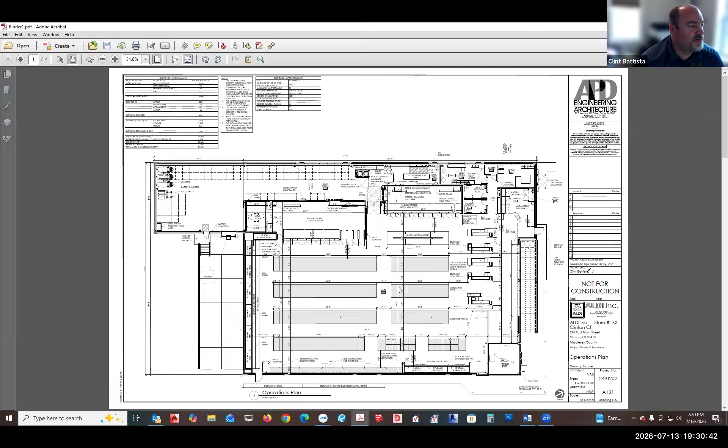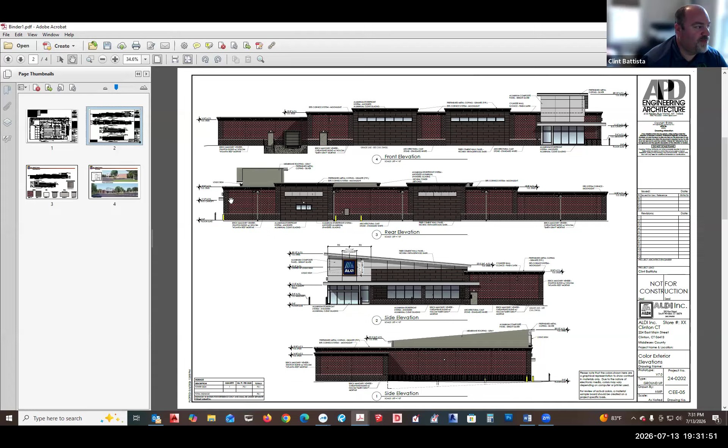These show the materials. The reddish color is a mix of different shades of red Spec-Brik. The pilasters and the water table are more of a gray colored Spec-Brik. The EIFS cornice up at top is kind of an off-white color. The main tower aluminum composite panel is a bright silver with a matching coping. This is the metal coping over top of the white EIFS cornice. And these are the Nichiha fields, which are fiber cement but have the aesthetic of wood planks.

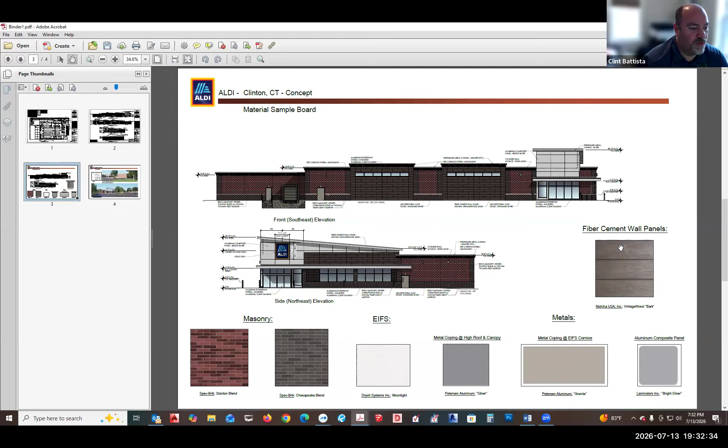Hello? He's probably just getting connected again. Clint, are you able to hear us? Yeah, was there a question? I'm sorry, yep, our recording paused while you had the 3D rendering up, so anything that was said right after - do you want me to show that again? Please.

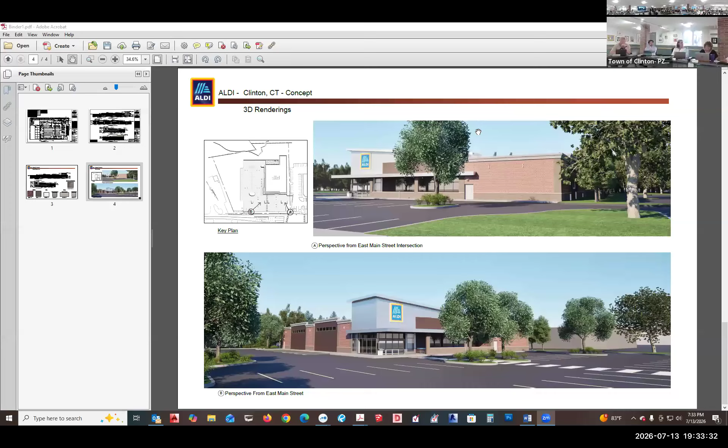Here's that 3D rendering that shows the two front side corners of that building from Route 1.

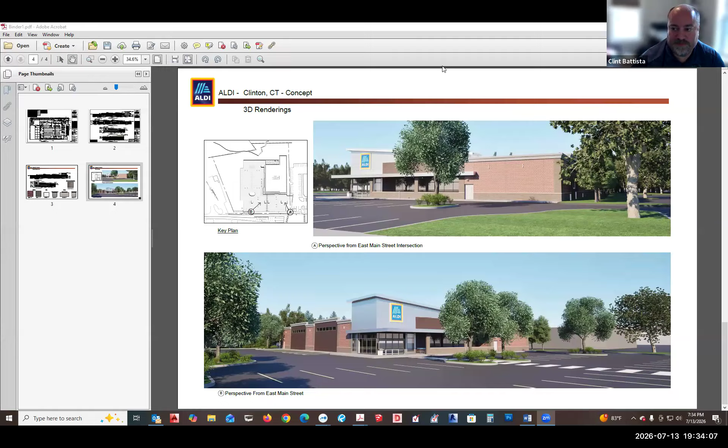Anyone have any questions that I could answer? We'll do questions after the team is done. Okay, do you want me to go back to anything or to stop sharing? You can stop sharing for the moment.

Just hang tight, I'm just going to go over the special exception criteria really quickly. So we are obviously here for a special exception permit, so there are 8 criteria that we have to meet. The first is the location, type, and character of the building. It has to be in use in harmony with the development, which I believe we are. Walgreens is adjacent to it, and the Stop and Shop shopping center is across the street, so I believe we meet the first criteria.

The second criteria is that adequate access for emergency vehicles and fire protection have to be met. Of course, the fire marshal and fire chief have reviewed it. They want to see the plans in construction, but the only thing they asked for was that we demonstrate that a fire truck can get around the site, which we have done. They also asked for a hydrant, which is placed on the site, and a Knox box for them to access the building. All of that will be worked out with the building permit at the building permit phase.

The third criteria is that the streets can adequately serve the development, which I think our traffic engineer alluded to, and we satisfy that criteria. The fourth is that the lot is of sufficient size to accommodate the use, so we meet the gross floor area requirements, lot coverage requirements, and landscaping requirements, even for the future improvements. So I do believe that we meet that criteria.

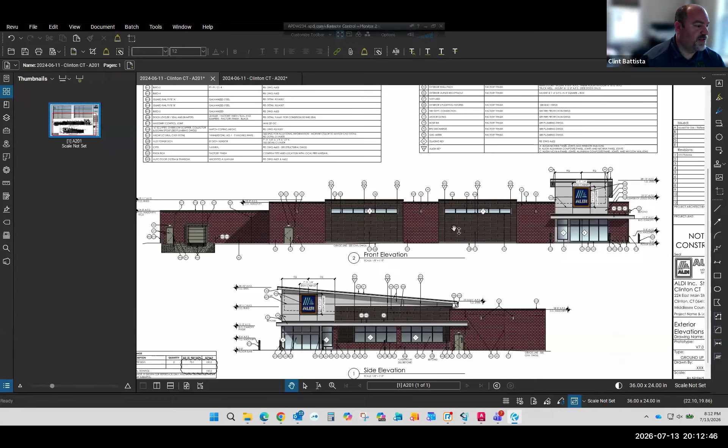So this is the side that faces Route 1. This is the side that faces the parking lot. This is the back, which is nothing but that Spec-Brik material, and then this is the loading dock area, which is nothing but the Spec-Brik material. So if you compare that to these drawings, I've got to flip over to the screen here.

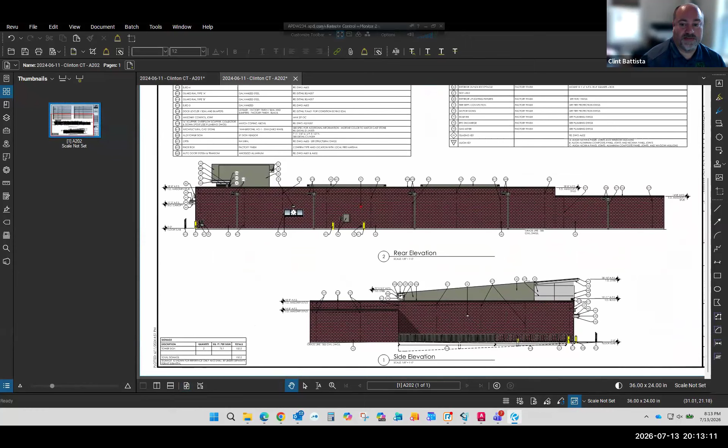So as you can see with these drawings, let me know when that pops up.

We added pilasters, a water table, and the top cornice here. We removed the sign on the side of the building. Each corner has those pilasters and the water table. We also added additional Nichiha panels on the back side of the building, where before it was nothing but one color brick. So we actually made substantial changes to this building design.

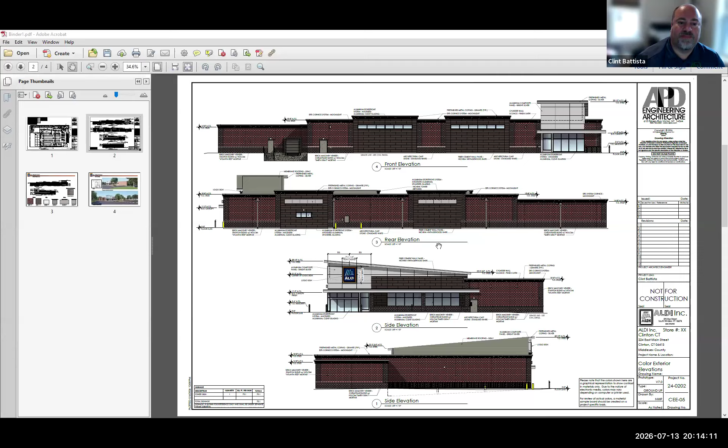Do you have the manufacturer's view of this material so the commission can get a better example, like an up close detail of it? I think that was on page 3 of this.

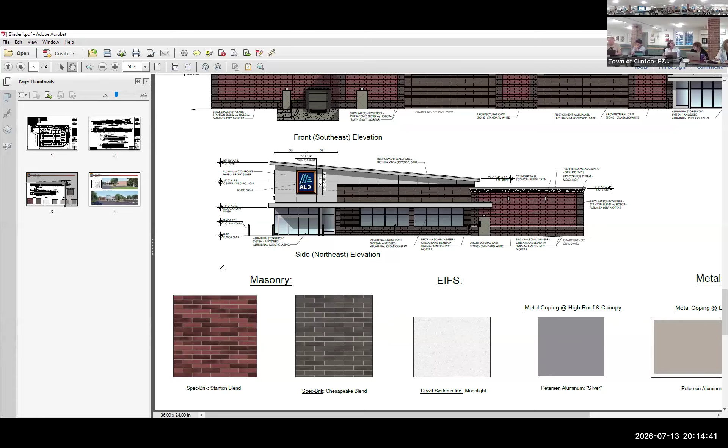This is a picture of it - it's not to scale because it's fit on a sheet, but this is kind of what it looks like. The red is not displaying as shades of red; it's hard to do that, but this is actually what it is. And the gray is kind of some shades of gray. I do have a material board in the office if you can confirm that the original materials sent to us are part of this application, we can certainly take a look at that. Yes, as long as they're Stanton blend and Chesapeake blend, those are accurate.

I'm still trying to understand - for the record, I'm Wes Kavanaugh - I'm still trying to understand these concrete masonry units. Are we saying they are 8 by 16, which is a standard concrete block size, and they are imprinted with a smaller pattern? So you are referring to them as a large brick, but they are concrete block size. That's correct, it's big. The manufacturer is called Spec-Brik. That is the actual manufacturer of this piece, and it's a concrete masonry size. Okay, so it's a concrete block size.

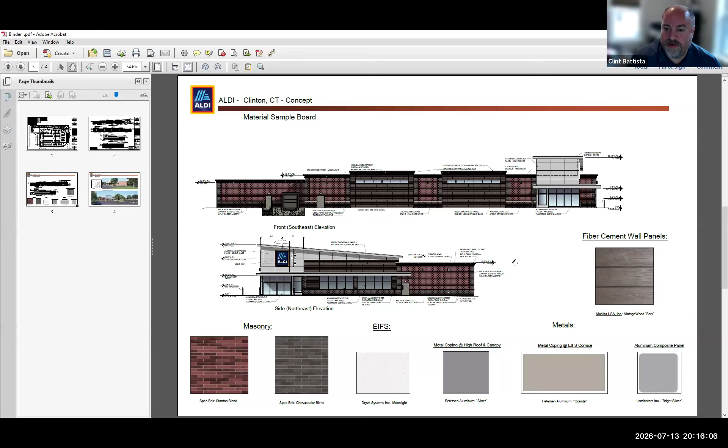So there's been no effort to make the facade look like a conventional brick facade, other than in color. It's a larger brick that has integral color, so there's less maintenance on efflorescence and the color wearing out, because it's not just painted.

Okay, we have the architectural samples here. Go ahead, walk around with it. Okay, so I don't know what we're looking at, but it looks good to me.

Well, I mean, I'm sure you can't say anything, but I'm sure. This only is what we had back at the design review meeting, so these are just the colors. I'll just come close to you guys and walk around and show you what they look like. I don't know if you guys want to pass them around or if I'll just stand here. There's Jeffrey, there you go. Sure. Here's the final, that's the approved one.

That is gonna be different shades of red. Yeah, all of it, I understand. I will put some on the board here if it doesn't fall off - the second page to the second board. That's what I said, that's gonna be different shades.

Mr. Chair, I just have a question about, again, Spec-Brik is a company - can I address them? You can address them. Spec-Brik is the company that's providing the facade bricks for the wall. And the apprehension - you can't speak for Aldi, but in your experience, reducing it to be more in line with the regular size brick we see is potentially cost prohibitive, and that's the issue we're seeing. Again, it's not that they don't provide it - there are two items. One is that a typical brick, because it's much smaller, drastically increases the labor cost to install it, so it is a significant amount of money to change that product. The other point is that Spec-Brik is a prototype approved material by Aldi, so it's in their palette of materials that they typically use.

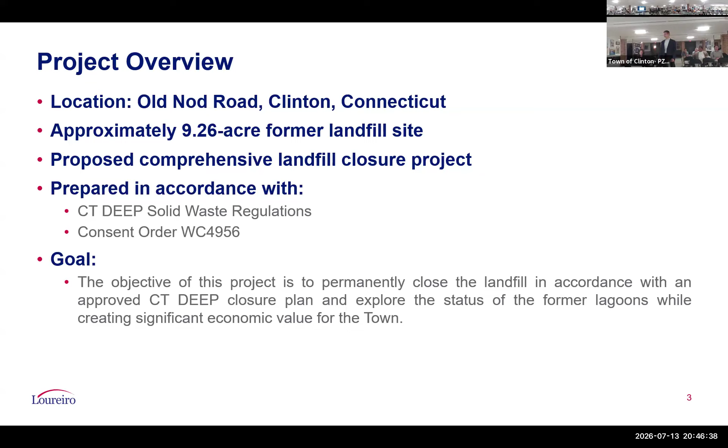What exists today is a landfill that still exists. It's not closed, so it's heavily vegetated with trees over much of it. It looks nice in that it's forested, but that's not acceptable for a landfill cap - when trees grow on the cap, it degrades it, and that's not an acceptable condition. This is a future closure obligation, so although the DEP hasn't actively enforced it, it's still something the town of Clinton has to deal with, and it's a multi-million-dollar unfunded environmental liability. So that's what exists today.

After this proposed project is completed, the consent order will be satisfied with a DEP approved closure. Our proposed approach will require no taxpayer funds. The town will benefit from a host fee from revenue generated by the project. We will have the opportunity to consider future use of the property and take care of the long-term environmental liability the town has today.

So again, we want to take care of the consent order, establish a stable final landform construction, minimize infiltration of waste materials, and reduce potential for leachate generation. This will improve stormwater management, stabilize steep slopes that exist today, protect adjacent wetlands and water courses, and have a long-term environmental stewardship program as part of the closure plan that's in the process of being approved by the state.

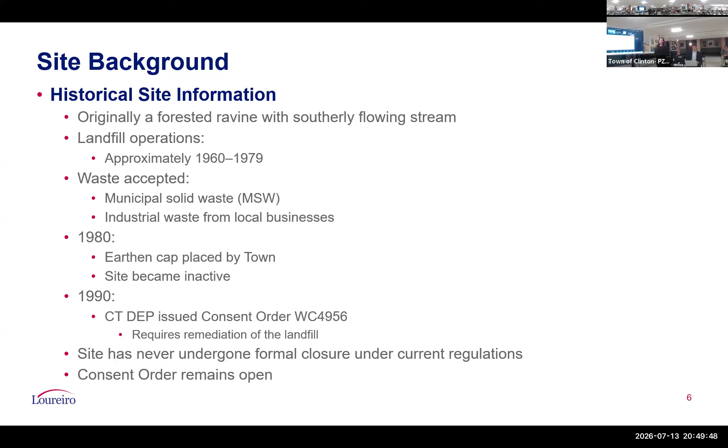So just to run through all the permitting and regulatory agencies we had to go through: we recently received approval through the town's Inland Wetlands Commission, received that last week. We're currently going through planning and zoning. Also through the state, we had to submit a solid waste individual permit, which included a closure plan. And we have approval on our material acceptability protocol, and we also have approval to begin stockpiling on the site.

We are waiting on full approval of the application, but based on conversations with the state, we know that's forthcoming. In addition to that, we also recently received authorization through the state stormwater program. We submitted a construction stormwater general permit that's under the project as well.

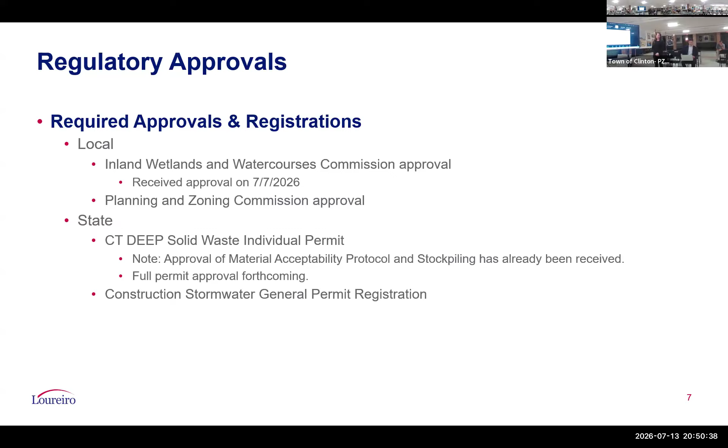So current site conditions: the site is currently vacant and undeveloped. There's dense vegetation throughout the entire parcel. There is an existing access road up to the top of the landfill from Old Nod Road. Adjacent uses consist of forested areas, residential properties, and the DPW property is located to the south of the landfill.

As I previously mentioned, there is an existing cap or cover that exists on the site. It ranges between 6 inches to 2.5 feet. And based on historic borings that were collected, waste was located between 1 to 51 feet below grade.

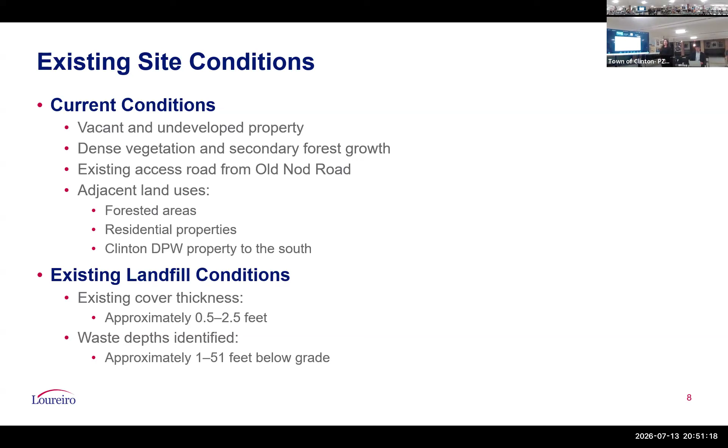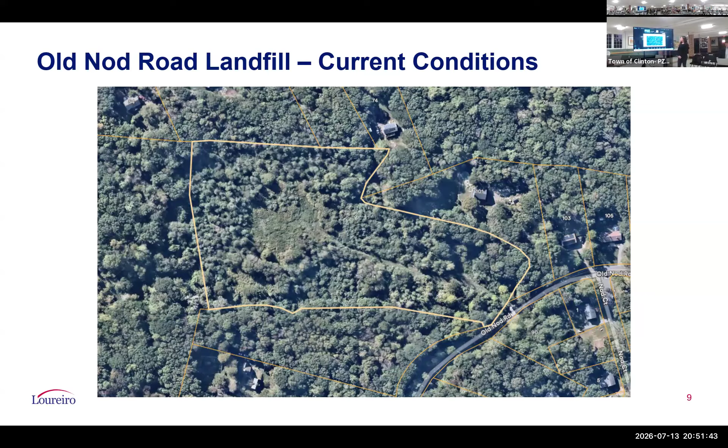Sorry. I'll just point out the delay is due to our internet.

Okay, so proposed site improvements. Major closure activities include placement and grading of fill material to bring the site up to subgrade. We'll then be installing a minimum 2-foot cover system. Regrading the steep slopes, we'll be installing permanent stormwater infrastructure, installing erosion and sediment controls throughout the entire construction process. There'll be a vegetative final stabilization on the site as well.

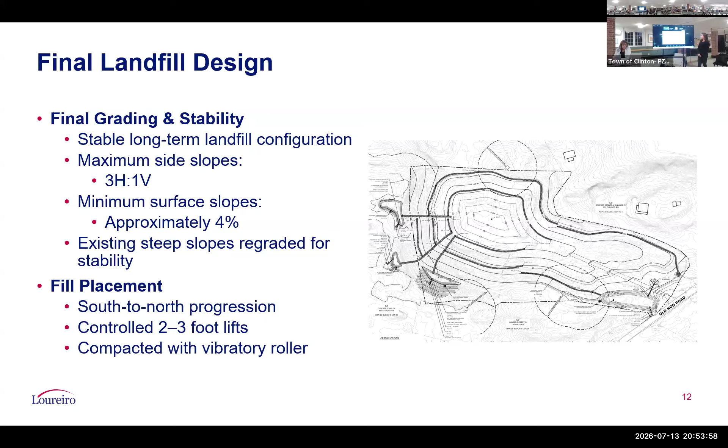For our stormwater features, we'll have diversion swale, shown as this darker line. There are two different rows of these swales that will capture runoff as it flows down. Those will ultimately flow into riprap drainage channels, which are located here.

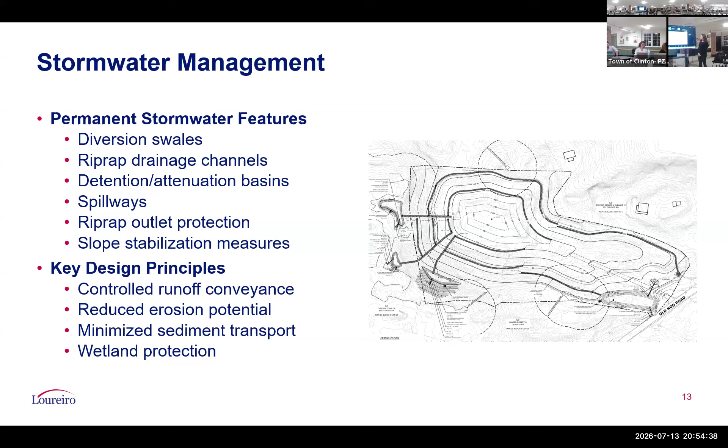And they'll ultimately flow into four different detention basins that we have on the site. Those basins will be equipped with low-level outlets and overflow spillways with riprap.

Key design principles associated with this design are to control runoff conveyance, reduce erosion potential, and minimize sediment transport. The stormwater design was designed per the Connecticut Stormwater Quality Manual, and post-development runoff was controlled for the 2, 10, and

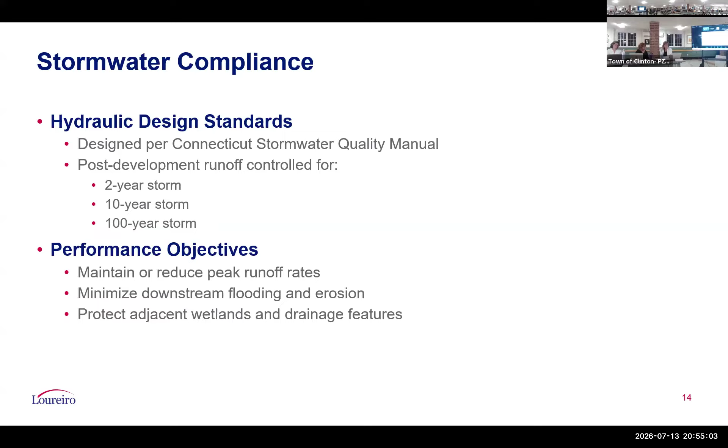100-year storm events. Again, we're maintaining or reducing peak runoff rates, minimizing downstream flooding and erosion, and protecting the adjacent wetlands and drainage features.

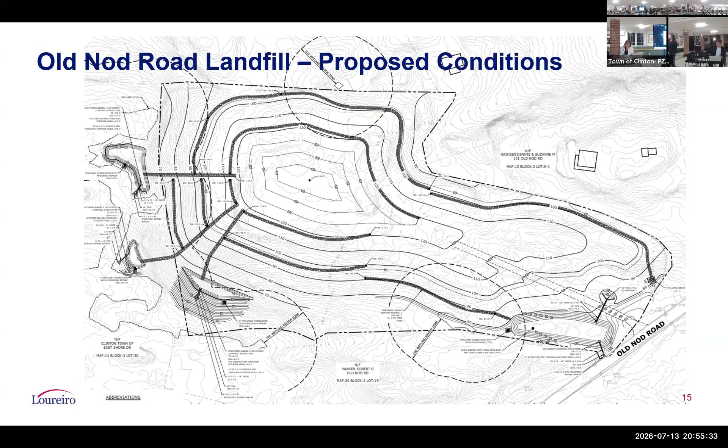This is just the grading and drainage plan zoomed in a little bit more. Again, drainage swales are collecting water, which ultimately will discharge into the channels and the basins. There is one little basin here as well, and we are reducing or maintaining peak flows on the site.

Also wanted to note, while it's loading, the basins will be equipped with a wetland seed mix. Will those basins be monitored in any way or tested? As part of our construction stormwater general permit, there are weekly inspections that are required.

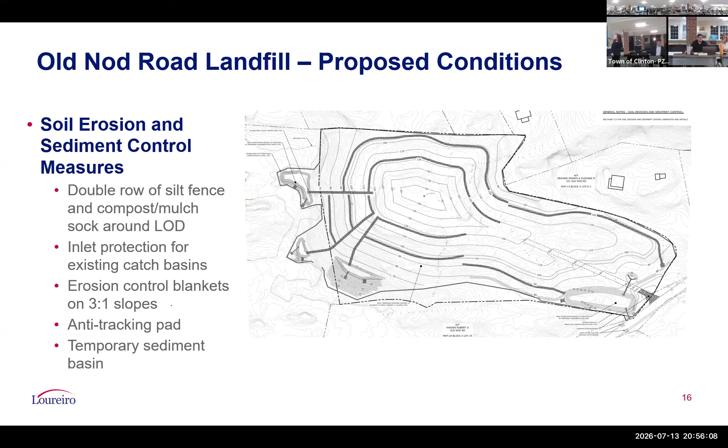For sediment and erosion control measures, we'll be installing double row silt fence around the entire limits of the project, as well as compost or mulch socks. That'll be installed and maintained throughout the entire construction process.

There are also a few catch basins in Old Nod Road where we'll be installing inlet protection. Also, any of the slopes that are 3:1, we'll be putting erosion control blankets down following the final grading.

As part of our construction stormwater general permit, there are weekly inspections that are required. So we'll at a minimum be taking a full look at all erosion controls that are placed on a weekly basis, but our team will also be on site daily and inspect if there's anything to fix.

There'll also be an anti-tracking pad at the entrance as well. So this is our site access route. This has been modified since the last time we presented to the commission.

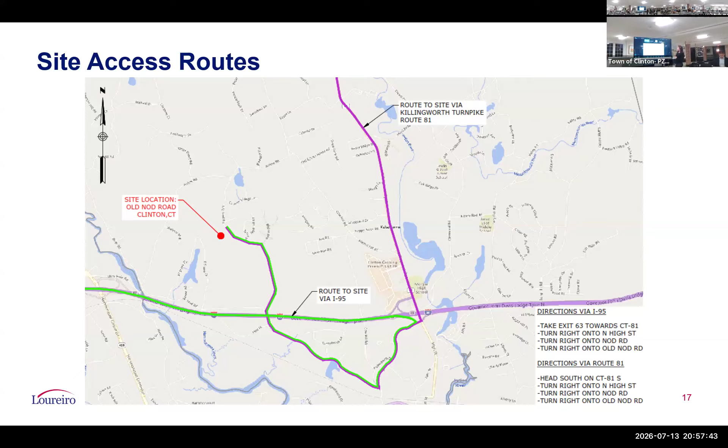There are two different potential directions, one being via I-95. Drivers will take exit 63, turn right onto North High Street, turn right onto Nod Road, and then turn right onto Old Nod Road. From Route 81, drivers will turn right onto North High Street, then Nod Road to Old Nod Road.

I also want to mention, we'll probably discuss this at some point as the presentation continues, but we have full control over the routes that the drivers are taking. We're in constant communication with them, so if this route is approved and it turns out the town wants a different route implemented, that's an easy phone call to make.

In terms of construction operations, we're anticipating construction to take approximately two years, open Monday through Friday, 7 a.m. to 5 p.m. Again, we have full control over the receipt of material and scheduling.

We're happy to be in close communication with the town on minimizing traffic on certain days and times if that's what the town would like to see. Site lighting is not anticipated as part of our construction operations.

Dust control measures will be implemented throughout construction, and we'll also have a water truck on site full time. As previously mentioned, soil erosion and sediment control measures will be installed prior to construction and maintained throughout the entire project. A tracking pad will also be installed to prevent any tracking of materials onto Old Nod Road.

We also have a street sweeper on hand, so if for some reason the anti-tracking pad is not doing its job, we can use the street sweeper while we fix the anti-tracking pad.

The four proposed stormwater sediment basins will be used as temporary sediment basins during construction, and those will be excavated out. If there's any sediment that accumulates during construction, that'll be excavated out.

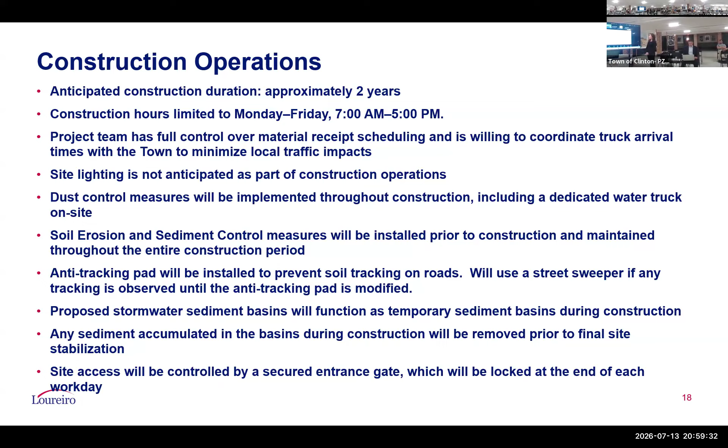Site access will be controlled with a secured entrance gate, which the town DPW will also have access to.

The material acceptance criteria is for imported fill and cover. This is something that the State of Connecticut DEP has approved. The criteria for this material is intended to meet the Connecticut remediation standard regulations.

It's intended to be protective of both human health and the environment. It requires an LEP, a licensed environmental professional, to attest to the source material, and all constituents of concern will be analyzed for and comply with the material acceptability protocol.

Just to clarify, for material acceptability protocol, the acronym we're using is MAP. That is a component part of the state closure plan.

Each source of material brought to the landfill as part of the closure will be characterized prior to acceptance. We have paperwork tracking, truck registration requirements, and inspections in place to ensure criteria are met. We'll also have a third party that we hire to check and ensure the material is acceptable. That's something I'm happy to make available to the town.

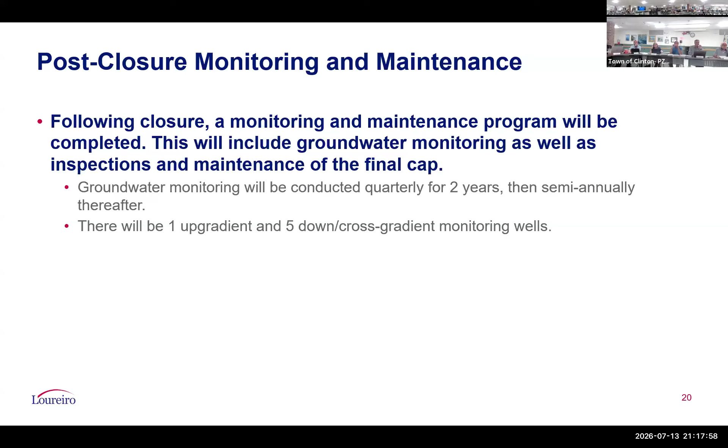Next question - when you guys talked about testing and monitoring the groundwater, does that include the residential wells in the area? No, this is the monitoring wells around the landfill, so it's just groundwater sampling. The WPCA tests the residential wells periodically, and that would need to continue as well.

Is there a checking procedure to verify the fill is being tested? Say 50 trucks left the site - is there a method to verify that only 50 trucks came to the landfill? Could 5 others sneak in from a different source? No, we have a manifest check. All the trucks are registered, and as part of the paperwork they bring to the landfill, we're verifying that truck is permitted to come in. If it's not on our list, it will get turned away.

The second portion, not really related to testing - my understanding is there's no bond posted for damage to the roads with this contract, is that correct? That's correct. To me that's a major contractual issue. I know that's not something we can address here, but the idea that you're going to have hundreds and hundreds of trucks weighing close to 80,000 pounds apiece, and roughly half that weight, going over roads that weren't designed to carry that much weight - these aren't highways - and to not bond for such a thing, is Public Works looking at that?